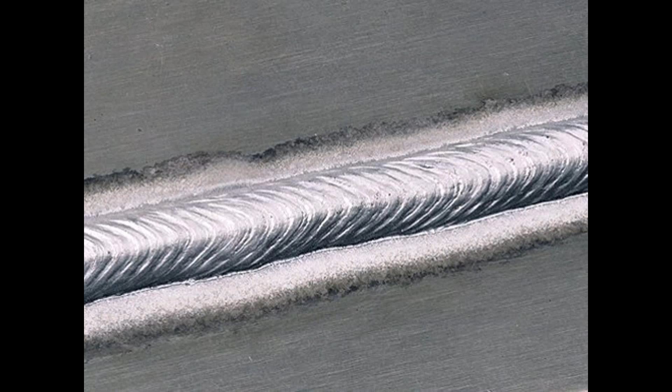I want to start out here by showing you this very nice looking aluminum weld, which has me recalling a story. Early in my career, in the 1980s, I was working down in Texas during the oil boom. There must have been a labor shortage, because even though I was relatively young, I rose to be the engineering manager at an aluminum fabricator company in the Houston area. As engineering manager, I was responsible for hiring and firing drafters, engineers, and cost estimators. And frankly, I didn't know a whole lot about that part of the business. Human resources was not something that had been invented yet. We just had employees and we were lucky to have them. So I decided that in recruiting and interviewing potential hires, I needed to get up to speed. I read some article in some magazines suggesting that the way to get to know a person was to ask them questions, get them talking about themselves. A good question to ask was, what are your biggest weaknesses and what are your biggest strengths? So the first guy that I'm about to interview comes in and I'm sort of fumbling around for what to say. Then I realized, oh yeah, I've got to ask him a question. So I said to him, so what's your biggest weakness? Without hesitating, the guy said, oh, my honesty. I was immediately taken aback because I was surprised. I said, well, I don't think of honesty as a weakness. And he said, yeah, like I care what you think.

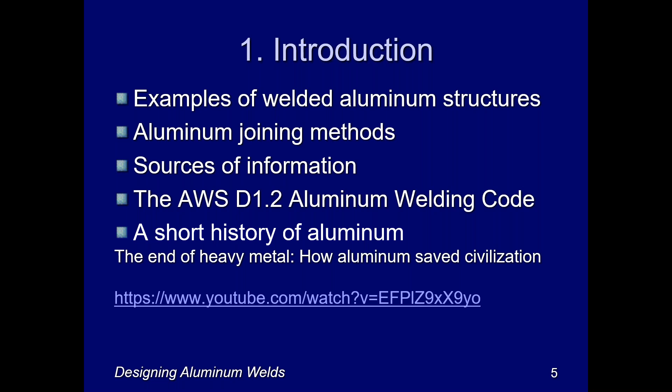When it comes to examples of welded aluminum structures, there have been many different types of applications welded in aluminum that have been very successful. I don't want to turn you off from aluminum welding, but there are a lot of cautionary notes, and we'll cover those.

Things like guardrails and handrails are very frequently welded in aluminum, typically using hollow shapes like pipes or tubes, but not necessarily. The weld at the base of the post of most guardrails is a very critical area because that's where the stresses are highest due to lateral loads on the guardrails or handrails. That's an area that comes up over and over again in my career.

Any sort of tank or vessel, whether for pressure or low pressure applications, corrosive, cryogenic, or low temperature applications where aluminum shines, if it's made from more than one plate or one extrusion, it's going to involve welding typically, because you need a liquid or airtight container.

Various highway products such as overhead sign structures, road sign structures, the little panels used to handle signal devices and control traffic lights, and light poles, otherwise known as luminaires in the highway business, many of those are made of welded aluminum. That's a very good example of welding and post-weld heat treatment and many other features of welding aluminum.

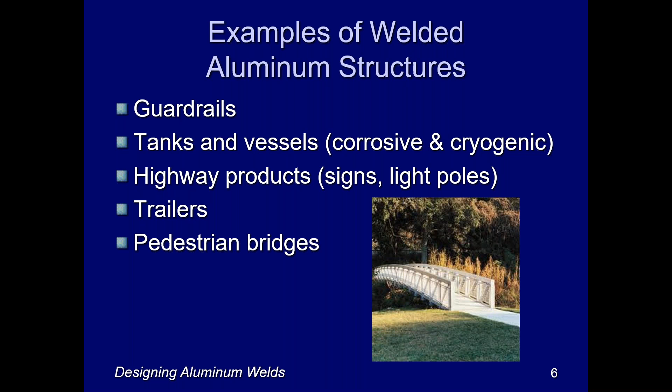Highway trailers, whether horse trailers or trailers hauled by tractor trailers going down the road with various consumer goods, are very often welded aluminum, because they need to be lightweight. Pedestrian bridges like the one in this picture, if they're in remote locations and need to be brought in off-road, typically want to use aluminum because it's light, and very often they're welded.

But we often use those connections in series. In other words, you'd have a fillet weld, and then connecting the other end of the part might be a bolted connection. So just to illustrate that that is a possibility and is done.

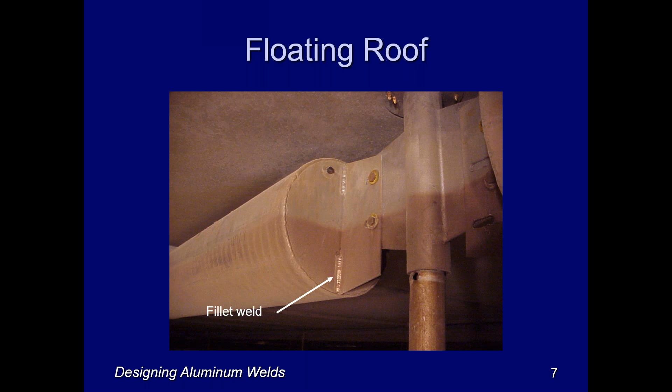Several years ago, I was involved in a bridge deck for the rehabilitation of an old suspension bridge. This is the Corbin Bridge in south central Pennsylvania over the Juniata River, 320-foot span. So it was a very long suspension bridge span of the late 1800s.

It was originally made with the ability to carry horse-drawn wagons across, and it had wooden planks for the bridge deck. Now, when automobile traffic was introduced in the early 1900s, they provided a paved roadway or deck on the bridge, but that was much heavier than what the bridge was designed for.

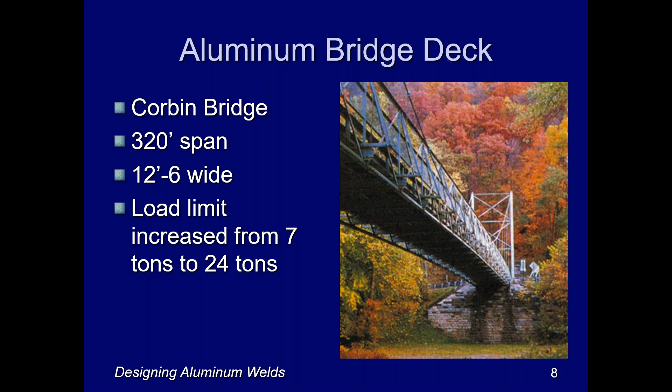With deterioration of the superstructure and foundations over the years, the load limit had been severely curtailed. But by changing the bridge deck from a paved steel combination deck to an aluminum deck, they were able to more than triple the capacity of the bridge.

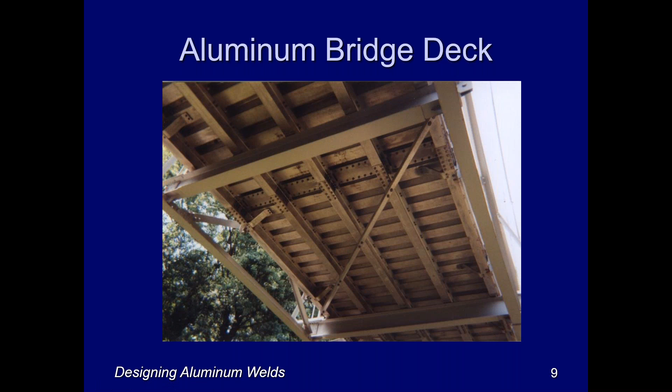You can see here in this picture from the underside that mechanical fasteners were used in parts to connect the various panels together that were aluminum extrusions that had been welded together in large 9 or 10 foot wide panels in the shop. So heads up there, we typically don't do aluminum welding in the field, but rather in the shop.

Now, there's a lot of ways to connect things, and there's a lot of ways that mechanical engineers and structural engineers look at things, but my father-in-law always subscribed to the notion that we engineers made things way too complicated, and that really there's just one of two answers for every problem. That was WD-40 or duct tape.

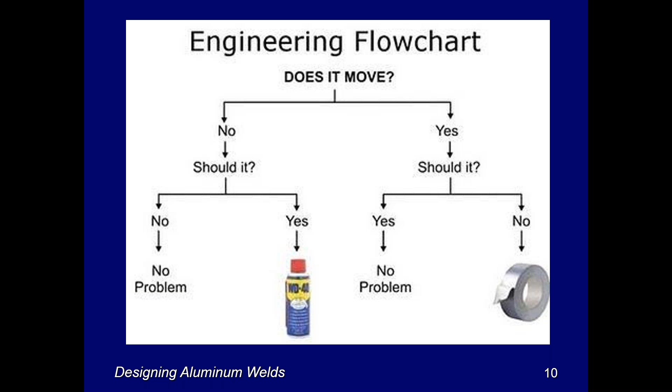But if you don't subscribe to that theory, if you think that maybe life is a little more complicated, you're probably right. Then you might want to look at the larger view of various joining methods. When it comes to joining methods, I think of mechanical fastened joints, welded joints, and adhesive bonded joints. It's really worthwhile thinking about all of these and deciding which of these is the most appropriate for your particular application before you just assume that you need to weld something together.

But when it comes to welding, there are different welding processes, and some of those could be categorized as fusion welding, and that'll be gas metal arc welding or gas tungsten arc welding, which we'll talk about in more depth. And then solid state welding, where we don't get above the melting point of the material. That's friction stir welding as a good example. We'll talk a little bit about that.

And then there are processes which are done at temperatures below the melting point of aluminum, but above the melting point of the various filler metals that are used, the brazing and soldering materials. We won't talk about those because they're not typically used in structural applications, but they can be used to provide airtight or gas-tight sealed joints.

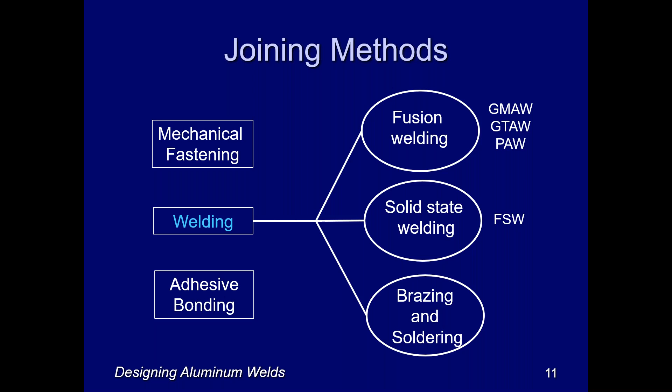We'll talk a little bit more about the aluminum design manual here in a moment, but just keep in mind that there are different types of mechanical fasteners. They have different pros and cons, and sometimes they're a much better alternative to welding for reasons that we'll see.

And I also want to mention adhesive connections because they are often used in structures. In fact, they're used in the aerospace industry for helicopter rotor blades as one example. And so they must be good for something. I mean, you trust your life to them essentially, but they're not addressed by building codes. And so they're not typically used in architectural applications.

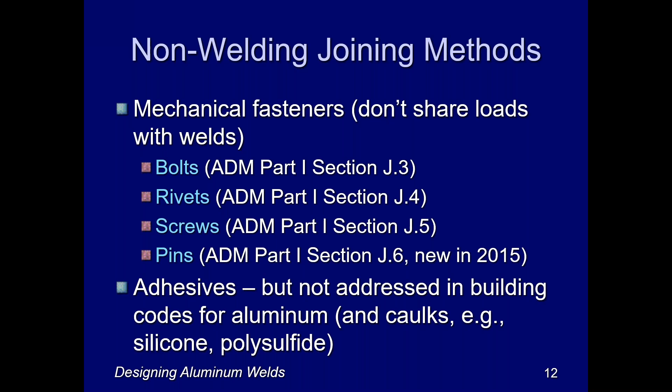I do want to mention that various types of caulks or sealants, such as silicone sealant or polysulfide sealants, can do an excellent job at non-structural joining of aluminum. For example, if you want to keep the weather out, or join flashing together, or something designed for weather tightness, sealants can be a very good way to join aluminum together when you properly prepare the surfaces as the manufacturer directs.

But coming back to welding, most people who do aluminum welding today are using an arc welding process, and there are two arc welding processes that are very popular. They're both inert gas shielded arc welding processes because an inert gas, either argon or helium, is used to shield the arc and the base metal that goes molten from oxidation. Gas metal arc welding, sometimes referred to as MIG welding, metal inert gas, is one of the two processes, and gas tungsten arc welding, sometimes referred to as TIG welding, is the other.

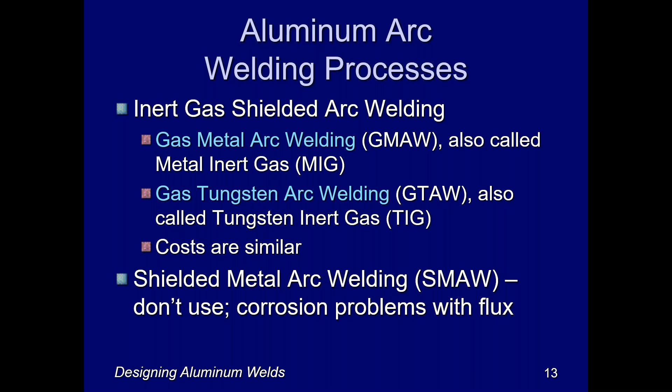Now, these two have rather similar costs when it comes to the overall bottom line cost, but they have different applications, and gas metal arc welding is probably the more popular and more commonly used today for reasons we'll see. Now, there also is shielded metal arc welding, but it has some real problems when you try to use it in aluminum. There's a flux used to remove the oxide from the aluminum before welding, and that flux is very difficult to remove and causes problems down the road with corrosion, so it's not a recommended process.

There are other aluminum welding processes. I already mentioned friction stir welding, and stud welding is another, either by arc welding or capacitor discharge processes, and plasma arc welding. These are addressed by the American Welding Society Structural Welding Code D1.2, but there are yet even other welding processes that are perfectly good for aluminum, used say in the automotive industry: laser welding, resistance welding, electron beam welding, all sorts of exotic processes that have very narrow applications typically. We're not going to talk about those because they're not as widely used, and they tend to be for various niche applications.

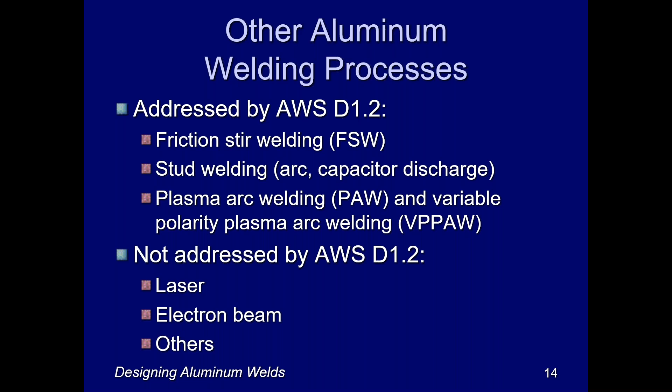Now, that electrode wire is being pulled off a spool, which is back in a cabinet, and this wire feed mechanism is going to deliver that wire to the arc through that gun, and it's going to be done at whatever speed you set the machine at. Therefore, this process is sometimes referred to as a semi-automatic process, since the machine is going to control the wire speed, and the operator or welder is going to control the speed at which you move the gun along the joint.

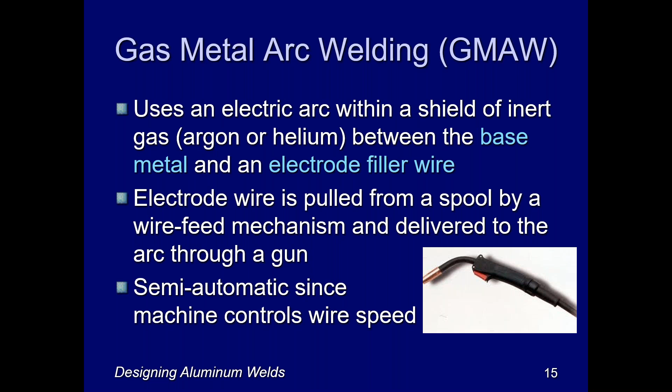And if I want to add filler metal, I can do so with a rod held in my left hand that I feed into the joint. Now, if I don't use any filler metal, it's referred to as an autogenous weld, which is really just a fancy way of saying I'm melting the two parts together. And that's typically done with sheet metal.

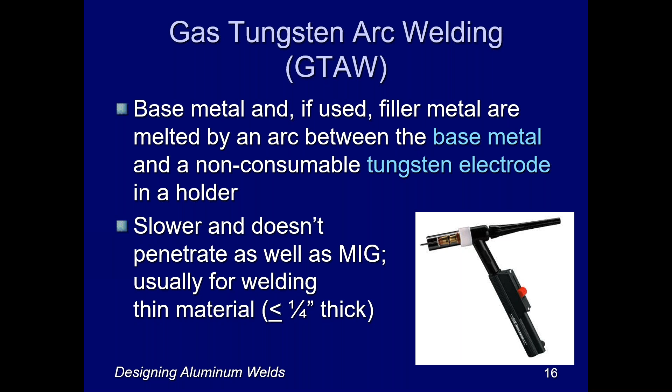Now, TIG welding is much slower than MIG welding. A lot of people think the speed of welding is what's going to control your costs. That's not entirely true, but people like to weld quickly. They might tend to use MIG instead. And furthermore, TIG welding is typically best used on thin material, say a quarter of an inch thick or thinner.

Now, before we leave the welding processes, we'll talk about friction stir welding. It's a relatively new process, patented in 1991 in the United Kingdom. It's a really slick process.

There's no edge prep in making a groove weld, so you don't have to bevel the sides of the joint or the parts. You don't use any filler metal. You don't use an electric arc. Therefore you don't need any shielding gas, and therefore there are no fumes.

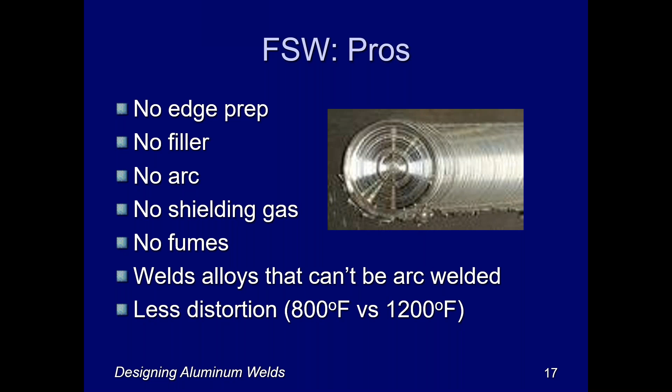And you can weld together alloys that can't be arc welded, and you do this all at a lower temperature than the melting temperature. Instead of 1200 degrees, which is an average melting temperature for most aluminum alloys, you do it at 800 degrees, and therefore you have less distortion and less heat effect on the base metal. So the process looks something like this.

There can be an exit hole at the point of withdrawal, and that can be an issue sometimes. Sometimes you need to use a runoff tab, or you need to have the exit hole in a low stressed area of the part, or maybe you need to MIG weld a plug in that exit hole, but there's various ways to address that. There are also more complicated friction stir welding processes that eliminate exit holes, but you get the idea.

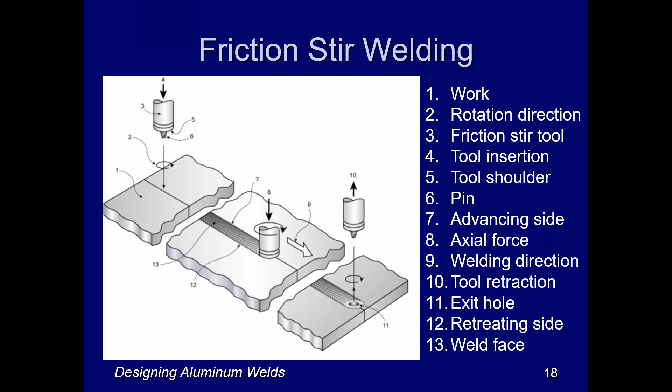In the summer of 1975, I was working as a construction inspector and surveyor in south central Missouri, and I'll tell you, it really got hot down there. At the end of the day, it was really nice to come home to a cold beer.

Now you're asking yourself, what does this have to do with aluminum welding? I'll get there. The summer of 1975 is also the first year that light beer was introduced. Miller went on an ad campaign and said less is more, their promotion for light beer. Less calories, you get it. I saw that and said, wait a minute, less is never more, more is more. That doesn't make any sense.

But being very thirsty and willing to try different beers, as I always am, I said, yeah, let's give it a try. I tasted Miller Lite and came away convinced that no, less is not more, more is more. Light beer is a travesty, the worst thing that ever happened to beer. How could you take something as good as beer and ruin it by trying to make light beer? So I became convinced that no, less was never more.

Until a couple of years later, I got involved in aluminum welding, and then I realized there are times when less is more, and that is in welding aluminum. The less welding you do on aluminum, the better off you are. And that's for many reasons.

First of all, no matter how perfect your welding process is and how good your welder is, welding decreases the base metal strength of virtually all aluminum alloys that have been tempered to get more strength. So it wipes that out. Not only that, welding can distort members because of differential cooling. You have residual stresses that result in distortions, and that can be a real problem.

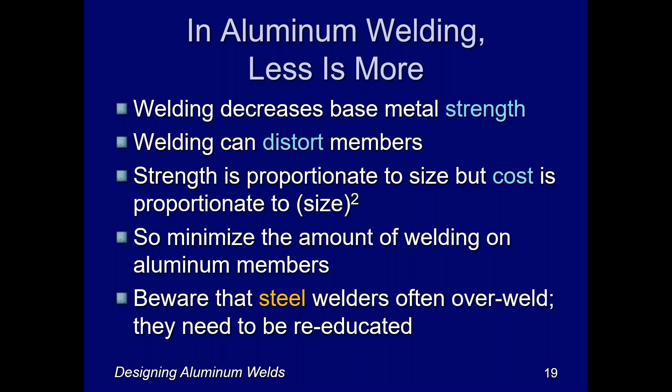That's a problem for people traditionally welding steel because they figure, hey, if I give you a larger weld than you call for, you ought to be happier than a pig in slop, and that's just wrong. In the case of aluminum, less is more and more is less.

Let me give you some sources of information because I'm not going to be able to cover everything for you here, but I do want to mention three good sources. One is the American Welding Society, not only because they carry the Structural Welding Code D1.2, but other publications such as the Practical Reference Guide to Welding Aluminum.

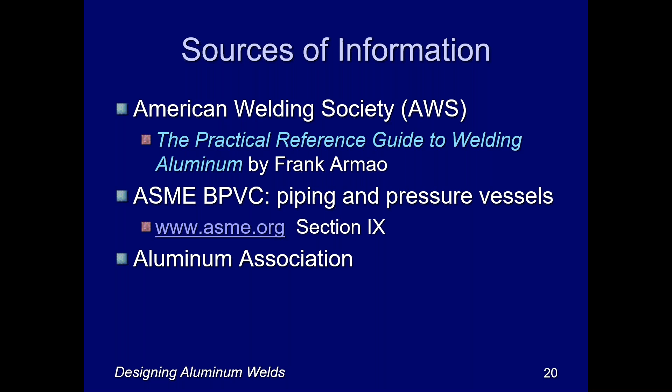The American Society of Mechanical Engineers Boiler and Pressure Vessel Code, Section 9, has got a lot of good information on welding aluminum vessels and vessels of other metals. So if you're involved in vessel and boiler type applications, that's something to look at.

The Aluminum Association goes back to about 1933, and today it consists of over 100 members, all the major U.S. aluminum producers and suppliers. It writes most of the standards used worldwide on aluminum, which is very good for Americans because we're more familiar with these standards and ways of designating aluminum alloys and so forth. This can be a very nice thing for us.

I provide their contact information there, but suffice it to say that aluminum.org will get you to their location. They're in the Washington, D.C. area, but their website contains all their publications and a nice bookstore to get them. And by the way, if you think I'm promoting any of these organizations or their books, I don't get any commission off their sales, so I don't mind if you buy them or not, but I'm just trying to point out what might be useful to you.

One of the best books ever written about aluminum welding is an Aluminum Association publication called Welding Aluminum Theory and Practice. Now it's become a little dated since the last edition was 2002. We've been working for the last year or so trying to rewrite it, and it's almost ready to be republished. So you might want to think about holding off before you buy the next edition, but it's a very good and very informative look at aluminum welding.

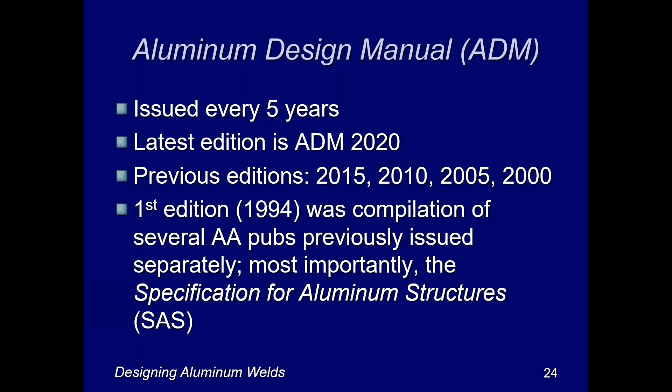But I do want to also mention that the Aluminum Design Manual has got some other very useful parts. For example, part 6, Design Aids, contains lots of handy design charts, including welded allowable aluminum stresses, and part 7, the illustrative examples, includes welded connections that you might find useful, particularly for those topics.

But the Bible of aluminum welding is the AWS D1.2 code. You know, you could say there are only 3 things you need to know about aluminum welding: the first one is D1.2, the second one is D1.2, and lastly, you get it, D1.2. I say that, obviously it's the old joke like in real estate, but it's very true. There's no substitute for having D1.2 and having a basic understanding of it if you're going to do aluminum welding in the United States.

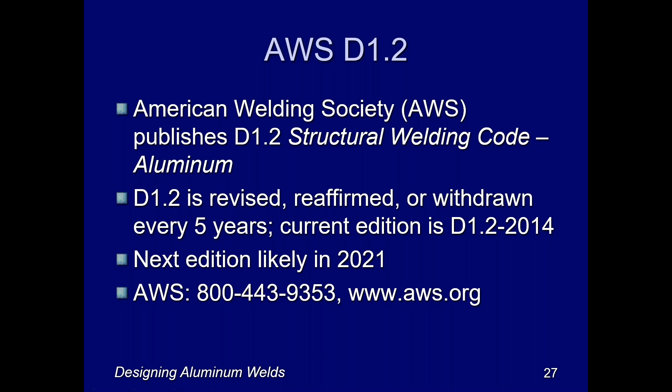Now, this document is supposed to be revised, reaffirmed, or withdrawn every 5 years, but the last edition was 2014, and here it is 2021, and we're still struggling to get another edition out. I think the next edition will very likely come out before the end of the year. The pandemic had nothing to do with the delay in this publication. Rather, it was internal issues at AWS and in satisfying the various committees that need to approve this code. But at any rate, this is coming out soon as a revision without terribly many changes, but a few important changes from 2014. And I give you the contact info there at AWS in case you want to get a copy.

D1.2 scope is welded aluminum structures, and that includes anything you call a welded aluminum structure - that's just a general moniker. There are other codes, like the boiler and pressure vessel code, that address particular applications like pressure vessels, and there are federal codes for tanker trucks that go down the highway. But D1.2 is for everything that doesn't fall into a particular application with another code governing.

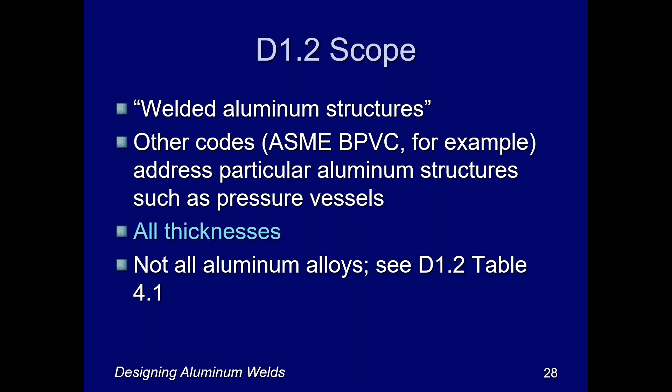It covers all thicknesses of aluminum parts, so you can weld together sheet metal or 8-inch thick parts. But it does not include all aluminum alloys, only those listed in Table 4.1. It typically does not include aerospace alloys like the 2000 and 7000 series because of their copper content - they're not easily arc welded, though they can be friction stir welded. That's another reason to be aware of friction stir welding. But those are the only limitations in D1.2.

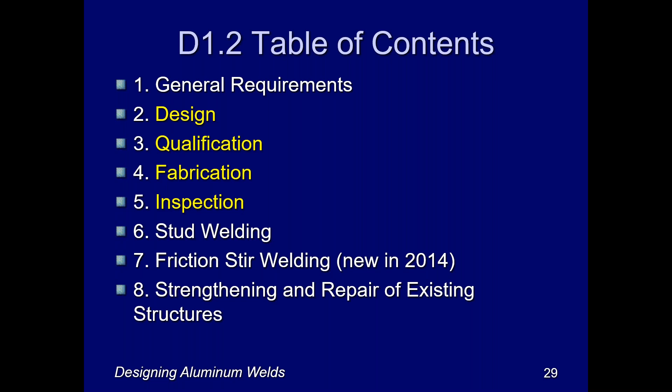A lot of people are familiar, if at all, with AWS structural welding codes through D1.1, because D1.1 came before D1.2 - it's the steel welding code. People familiar with D1.1 want to know what's different about D1.2, and I think that's a handy point of reference. There are some fundamental differences: there are no pre-qualified weld procedure specifications in D1.2. You have to qualify every procedure that you use, and that's a big difference.

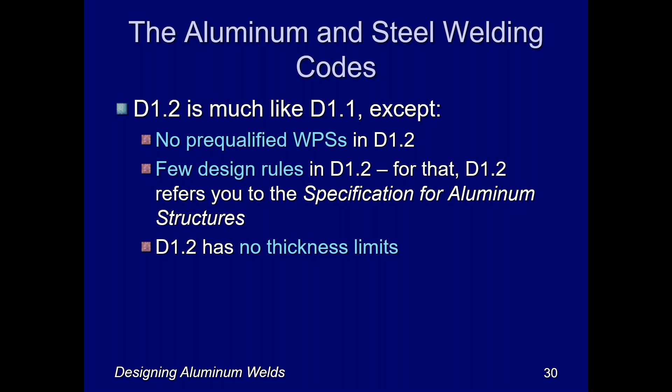There are very few, if virtually any, design rules in D1.2. The nice thing about D1.2, in my view, is that it refers you to the Specification for Aluminum Structures for those design rules, so there's no competing design rule sets in different documents. D1.2 tells you for design, go to the Specification for Aluminum Structures. The other thing is there are no thickness limits in D1.2, unlike D1.1, which only goes down to a minimum thickness of something like 1/8 inch.

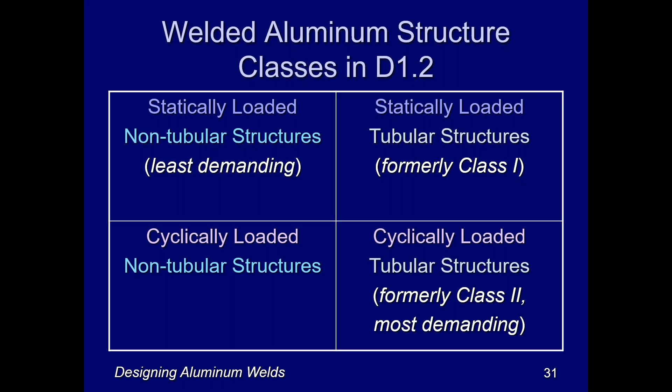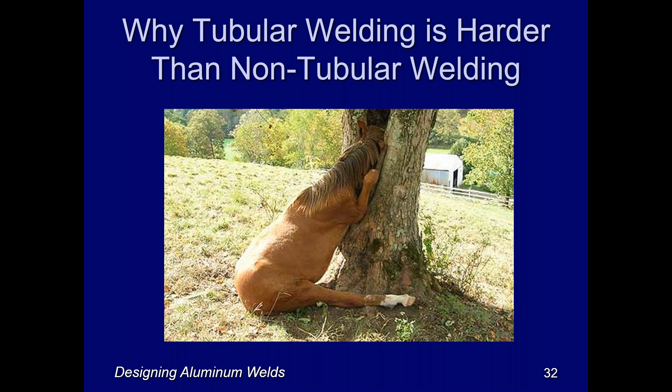Okay, enough of a general introduction.

Let me now talk a little bit about the metallurgy involved here. We'll talk about the metallurgy of the base metal, the parts to be joined, and the metallurgy of the filler metal, the metal we're going to fill the joint with to make the connecting material. When those two parts get melted together in some mixture, that's referred to as the weld metal, and its composition is somewhere in between the base metal and the filler metal, depending on how much dilution occurs in the joint. That's a function of a lot of factors, and it's going to determine the strength of the joint.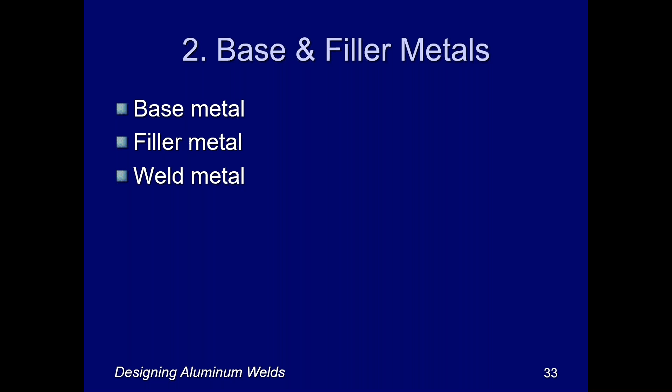Now, I mentioned earlier that when you weld aluminum, you typically reduce any strength that you got from tempering. Tempering processes like strain hardening or artificial aging are used specifically to strengthen the aluminum from its base metal condition, and when you weld it, you wipe those out. So that's a big drawback in welding aluminum.

Any kind of heating, for that matter, a fire, a paint bake cycle, can have that effect unless it's very controlled. In the case of welding, the temperature is so high, above the melting point, that it's going to reduce the strength on either side of the joint, and that's inescapable. So for H-temper material, welding reduces the strength to the annealed condition, and for T-tempers, it reduces the strength to something a little less than the solution heat treated, or T4 condition. Keep in mind that some alloys are not arc weldable - those would typically be in the 2000 and 7000 series.

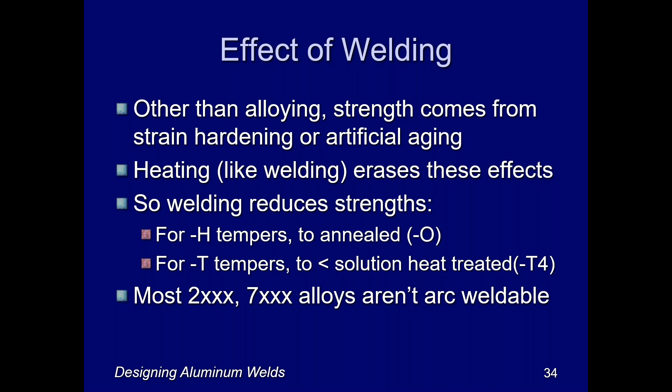So to show this graphically, a little bit clearer, there are the non-heat treatables and the heat treatables, and they respond a little bit differently. Most extrusions tend to be heat treatables, say 6063, T5, T6. What we see is that if we've done a precipitation heat treatment in addition to a solution heat treatment, so we have a T5 or T6 temper, when we weld it, we're going to reduce the strength to something less than the T4 strength, but a little more than the annealed strength. So what is that strength? How do we know what that number is?

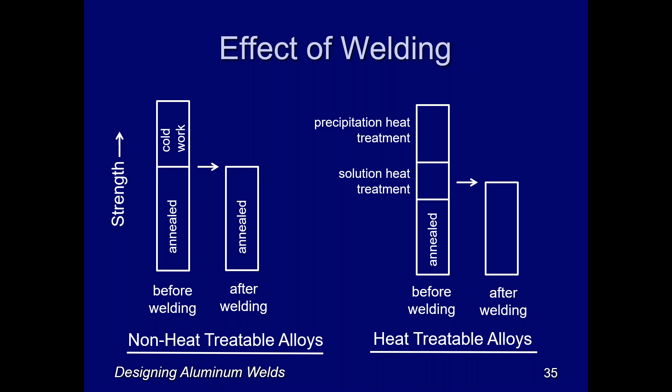Well, fortunately, the welded strengths of the base metals are listed in the specification for aluminum structures in table A43. The notation there is to add a W to the subscript, so when you see F sub TUW, that means the tensile ultimate strength in the welded condition, and F sub TYW would be the yield strength in the welded condition. Very fortunately for everybody, the AWS D1.2 table that gives the tensile ultimate welded strengths for the base metals has the exact same numbers as the specification for aluminum structures.

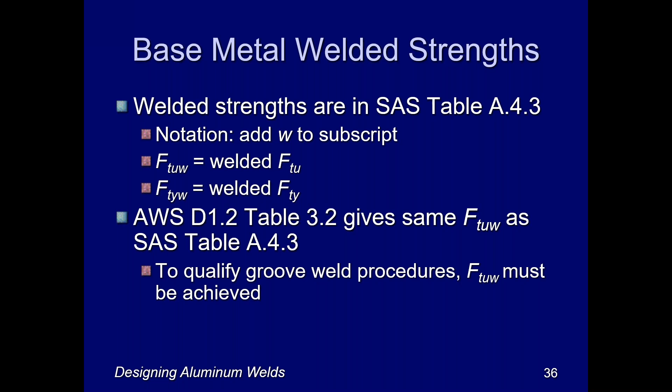And the requirement that D1.2 has is that if you're qualifying a groove weld procedure, you must attain in your testing the tensile ultimate strength in the welded condition given in these tables. That's determined by a tension test of a reduced section specimen, sometimes referred to as a dog bone specimen for obvious reasons from its shape. That tension test is used to determine the strength of groove welds, to prove that your weld is not going to be the weak link, and that you're going to develop the full tensile ultimate strength in the welded condition of the base metal.

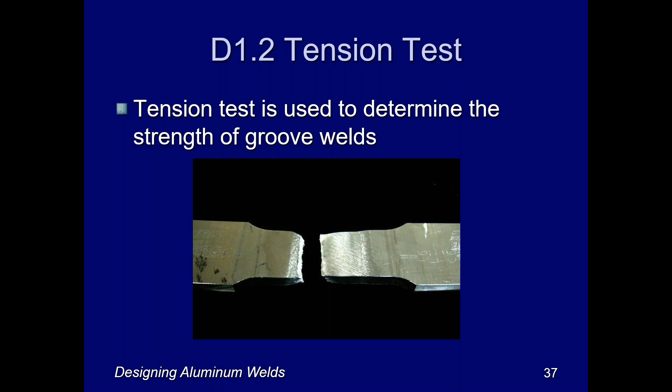So what does that do to the strength of the base metal? I've got 4 examples here - 2 of them are plates, 5052 and 5083, not extrusions, and the other 2 are 6000 series extrudable parts, like 6061 or 6063. Just to give an example, for 6061, if I have it in the T6 condition before welding, as an extrusion with a 38 KSI minimum tensile ultimate, I go and weld it - well, I drop the strength down to 24 KSI. So take a big whack.

And that reduction in strength is not something that I can overlook - I've got to factor that into the design. Not only that, the yield strength goes down even more - it goes from 35 KSI down to 15 KSI, less than half. And again, that can't be overlooked. It must be accounted for in the design.

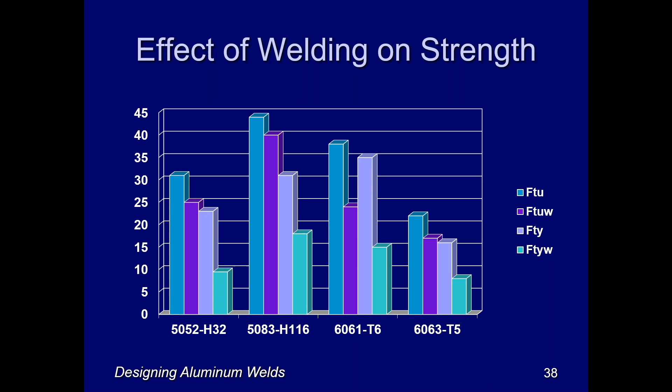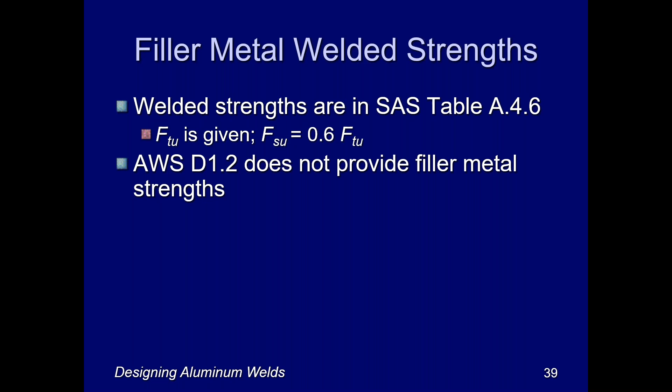Now, that's the base metal. For the filler metals, their welded strengths are given only in the specification for aluminum structures in table A46. They give the tensile ultimate strength there, and they say the shear ultimate strength is just 60% of the tensile ultimate strength. D1.2 is totally silent on filler metal strengths, so you've got to get them from the specification for aluminum structures.

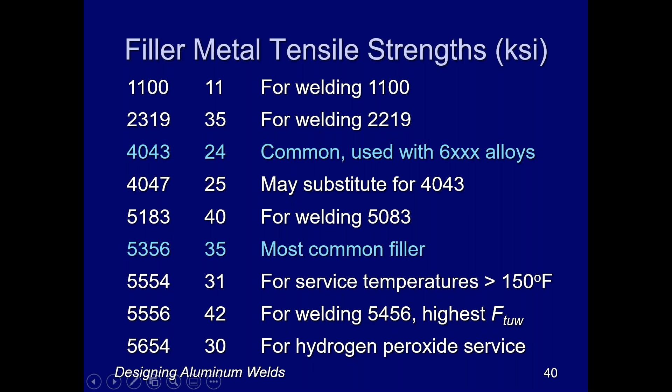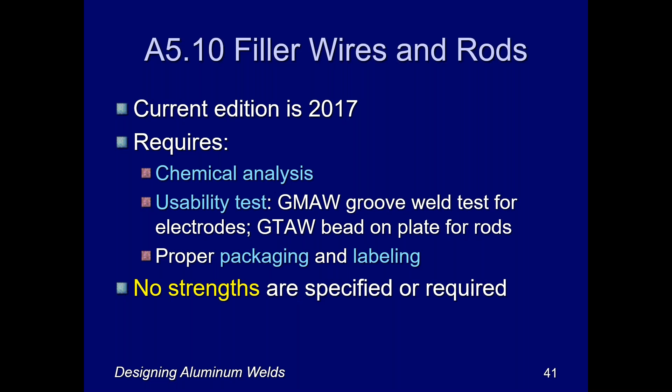Now, A5.10 is a publication put out by AWS, and it addresses filler wires and rods. The current edition of 2017 does not have any specified strengths either, so again, the only place you can get the strength of filler metal is to go to the specification for aluminum structures in the aluminum design manual. A5.10 though does have other requirements like chemical composition and important things like packaging and labeling, which you might be surprised at how important that is in preserving the usability and quality of filler wires. But A5.10 is useful in at least those regards.

Now, because there's a bunch of different filler alloys, and even if you're only going to confine yourself to 4043 or 5356, there are oftentimes questions that people encounter: how do I pick what filler alloy I'm supposed to use? To be honest, there are quite a few factors that may be taken into account in picking the filler, but I would say the first two are the fundamental and most important.

First of all, the strength has to be chosen properly. If you're doing a groove weld, the strength of the filler metal has to equal or exceed the strength of the base metal in the welded condition. Otherwise, you're not going to be able to pass that qualification test with that little dog bone specimen, and you can go no farther. The other thing is that the chemical composition of the filler metal and base metal have to be compatible so that you don't get hot cracking. Certain compositions of certain trace or alloying elements can be very prone to hot cracking. In other words, as the weld is cooling from its molten condition, they're very sensitive to cracking, and those combinations just those dogs won't hunt, so they don't work.

But there are other considerations like ductility, corrosion resistance, what service temperature you're going to be at, what sort of a color match you're going to get, particularly if you do a clear anodized finish. And the appearance—how the bead looks, whether you get a smooth bead or a ripple bead, whether you're post-weld heat treatable or not—depending upon your selection. So those can be important factors in various more refined considerations.

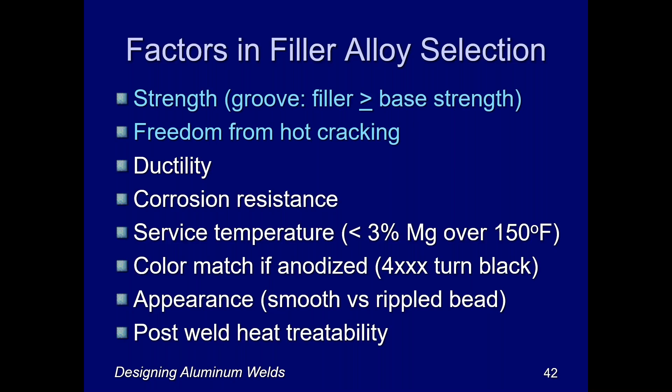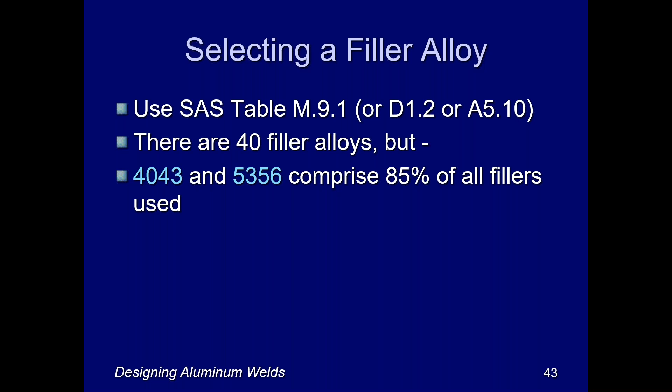Now, if you want to just follow the rules and avoid hot cracking, you can select a filler alloy using tables given either in the specification for aluminum structures, D1.2, or A5.10, the AWS publications. It can seem really complicated because there are 40 different filler alloys listed in A5.10, for example, but 9 times out of 10, or 85% of the time, it comes down to 4043 or 5356. Just to compare those two for a moment: 4043 is a little more fluid, a little less viscous, and it doesn't suffer so much from the black smut produced by the high magnesium content of the 5356 filler. But 4043 is less ductile and has lower strength than 5356.

On the other hand, 4043 has less cracking sensitivity and better penetration. So there's not a clear winner when it comes to deciding between these two, but rather it depends on your needs and your particular type of weld.

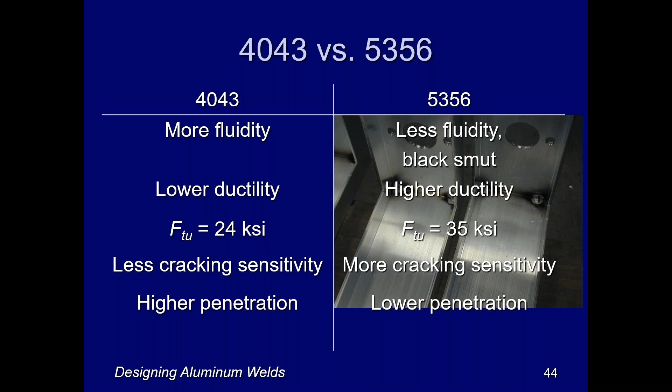Now, I mentioned crack sensitivity, and if you want to put a finer point on it, the composition of the weld metal after the weld is made—mixing the base metal and the filler metal—will dictate whether or not you're in the crack sensitive zone based on a certain composition of the alloying element. So for example, if you've got silicon in your base metal and filler metal, you want to avoid silicon content in the weld metal of between 0.5% and 2%. That's where the crack sensitivity is the worst.

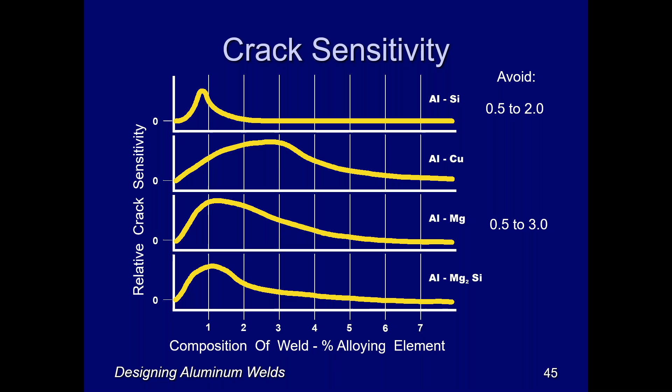If you can anticipate what the dilution will be in your joint, you can anticipate whether you'll be in that crack sensitive composition. To illustrate, you have very little filler dilution in a fillet weld, as shown at the top of this figure, and very high dilution of the filler metal at the bottom, which is a square groove weld. A V groove in between will have filler metal dilution somewhere between a fillet weld and a square groove weld.

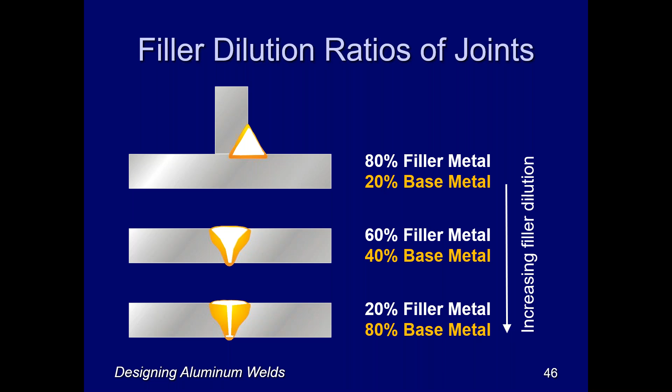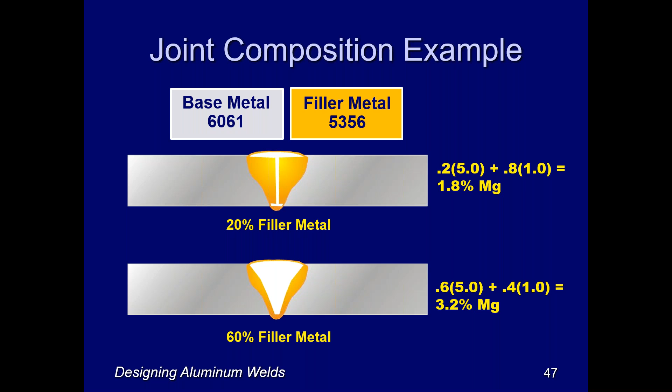These are things important to keep in mind, so a filler metal that works for a fillet weld might not work well at all for a square groove weld in terms of cracking sensitivity. The composition of the weld metal is calculated based on how much dilution you have and the composition of, say, the magnesium in the base metal and filler metal, as shown in this example: a square groove weld or V groove in base metal 6061 with filler metal 5356.

Now that we've talked about the composition of the base metal, weld metal, and filler metals used, let's talk about design. That'll be our last topic.

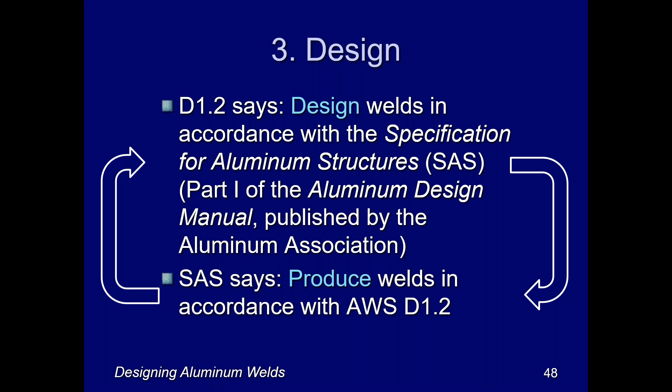D1.2 says design welds in accordance with the specification for aluminum structures, and the specification for aluminum structures says produce welds in accordance with D1.2. So these two documents fit hand in glove, it's a nice fit, and they dovetail well. The specification for aluminum structures is divided into a series of chapters with letters as their titles.

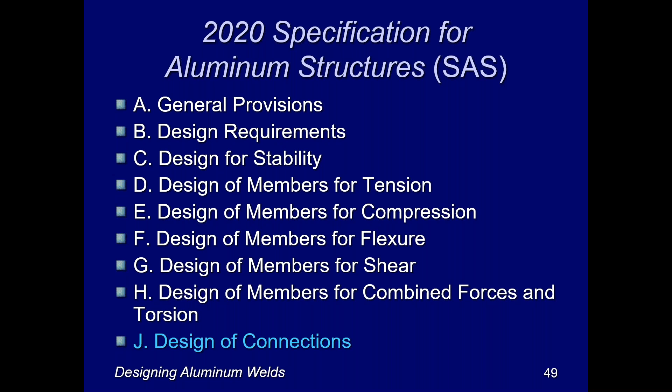For example, chapter J, highlighted at the bottom of this slide, design of connections, deals with design of bolted connections, welded connections, and so forth. That's a chapter we would typically look at when designing aluminum weldments. But there are other chapters included in the specification for aluminum structures.

I won't talk at length about those here, but suffice it to say the specification covers all aspects of aluminum structural design, not only strength but serviceability - for example, making sure parts or structures don't deflect more than they should in order to maintain their serviceability.

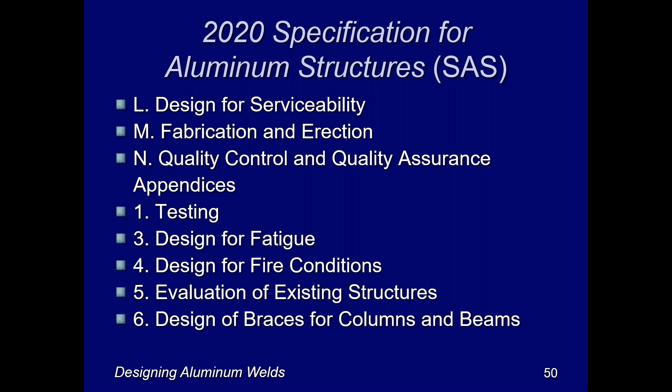There are two aspects to welding design covered in the specification: welded connections and welded members. We don't have time to get into the design of welded members, but that's covered by chapters D through G for various types of stress. Just be mindful that welding not only affects the strength of the connection, but you also need to consider the effect of welding on the strength of the members themselves.

If I see one error more frequently than any other, it's that people overlook this - they size the weld and look at the connection strength, but they don't look at the effect of welding on the strength of the member. That's something to keep in mind.

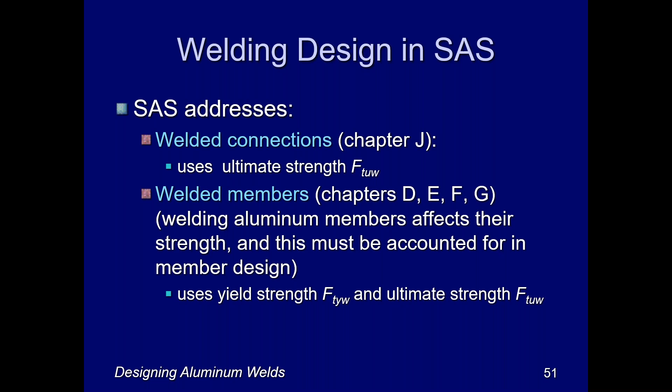With welded connections, the only material strength we need to be concerned with is ultimate strength, because we don't worry about a little bit of yielding in connections. But with welded members, we need to know the yield strength as well as the ultimate strength, so it's a little more complicated.

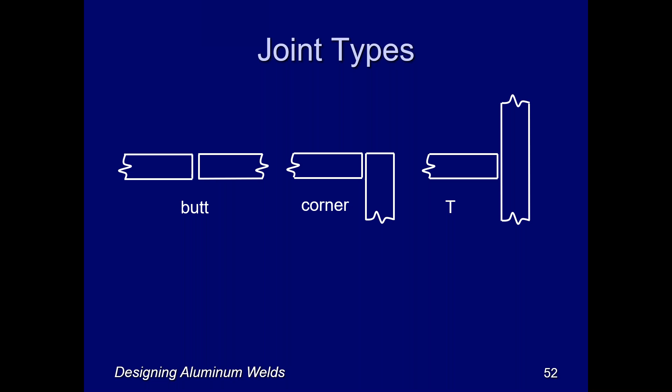With welds, we want to first be aware of what type of joint we have, then we can talk about what type of weld we have. The joint types typically encountered in structural applications are butt joints - two plates or extrusions butted end-to-end - corner joints, and T-joints. These are described in various American Welding Society publications, but there are weld types, and different weld types are suitable for different joint types.

For example, the groove weld I'm showing here is in a butt joint. Groove welds and fillet welds are the ones we'll talk about here, due to time limits, but there are other types like plug and slot welds and stud welds also done in aluminum, each with their individual niche applications.

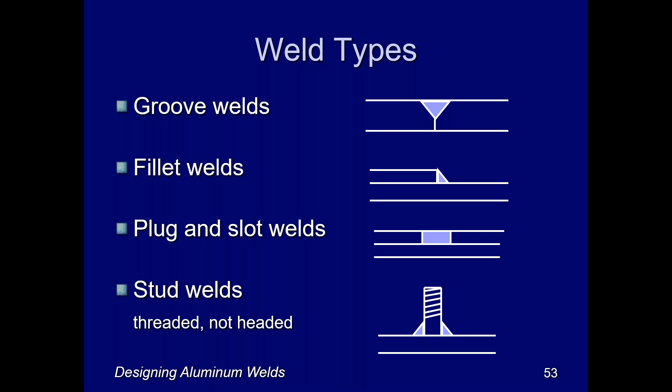Here's a groove weld, a picture I took in a sign shop up in Milwaukee, between two parts that are, I forget, 3/8 or a quarter of an inch thick - a typical example of a groove weld.

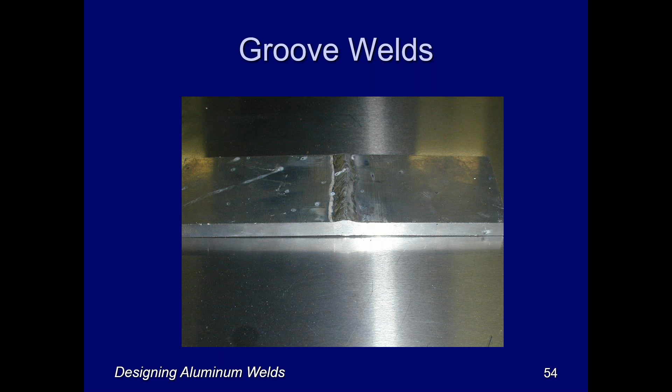Now, in order to determine the allowable strength of a groove weld, we take the allowable tensile stress times the effective area of the weld. The effective area is going to be the size of the weld times the effective length of the weld.

Now, the size is different depending upon whether we have complete joint penetration or partial joint penetration. If we have complete joint penetration, the size of the weld is the full thickness of the part. If we don't have CJP but have PJP, partial joint penetration, then the size of the weld is equal to the depth of preparation, the depth of that groove you saw in the sample weld above. And the effective length is just the width perpendicular to the direction of stress.

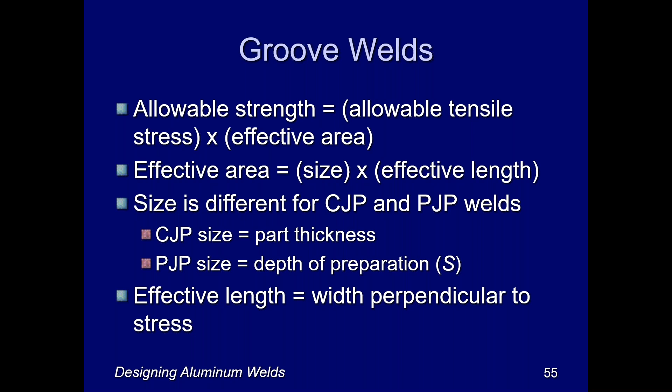Now, how do you know if it's a CJP or a PJP? Well, the basic rules are, with small exceptions, it's CJP if you weld it from both sides. First you weld it on one side, flip it over, back gouge the crud and stalagmites drooping out of the backside, and then weld the backside. Or you weld it from one side with an integral or removable backer on the backside to prevent the crud and stalagmites from accumulating there.

Otherwise, it's PJP. In other words, you welded it from both sides but didn't do the back gouging, or you welded it from one side without a backer. Why would you weld it from one side and not have a backer? Maybe because it was a tubular part you were joining and there was no way to get a backer on the backside.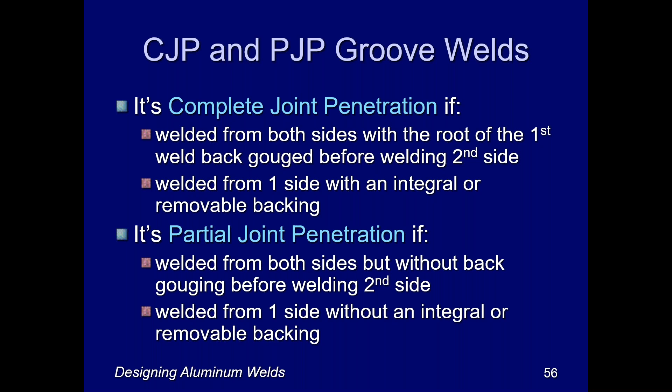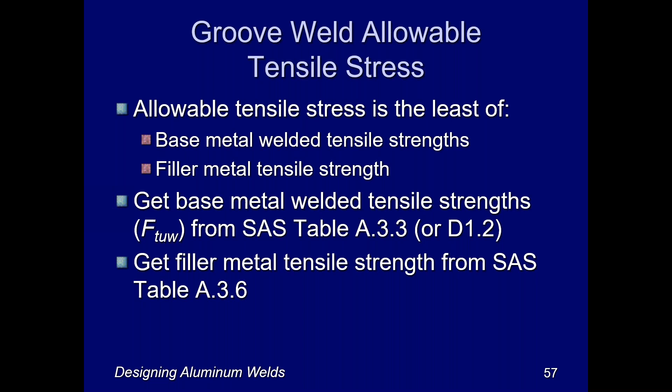Now, the allowable tensile stress is the other part of the equation once we've got the size of the weld and the area of the weld. The allowable tensile stress is the least of the base metal welded tensile strengths and the filler metal tensile strength. We get those base metal welded tensile strengths from the Specification for Aluminum Structures table or the D1.2 table, and we can get the filler metal strengths only from the Specification for Aluminum Structures.

And so the strength of a groove weld is really just another demonstration of the principle that a chain is only as strong as its weakest link. So we have base metal in the heat affected zone on one side of the joint, the filler metal in the middle, and the base metal in the heat affected zone on the other side of the joint.

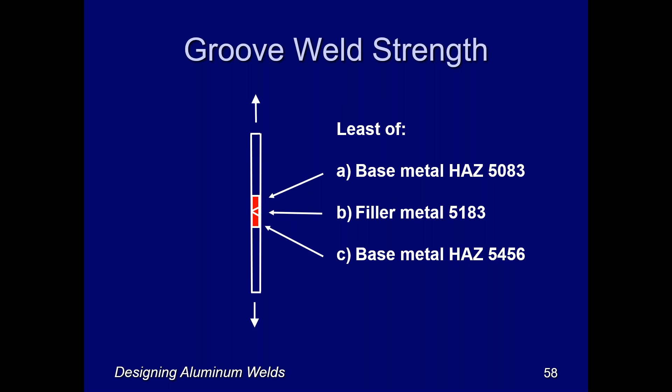Let's say, for example, I'm welding together 5083 and 5456 with a 5183 filler. In that case, I need to look at the strength of each of those three parts. For the base metal, let's say it's a 4 by 3/4 inch thick bar, and I'm going to weld it from one side without a backer, using a 5/8 inch deep V groove as my preparation.

The reason we make that V groove is to allow the welder access to the root of the joint so he can get penetration at the root. But if we don't use a backer or back gouge and weld from the other side, we can't be assured of fusion beyond the root, and therefore that last 1/8 of an inch of thickness of the material here doesn't count as the size of our weld.

So this weld is a PJP because I didn't use a backer, and the size is 5/8 of an inch, the depth of preparation. The length is 4 inches because it's a 4-inch wide bar, which makes the effective area 2.5 square inches.

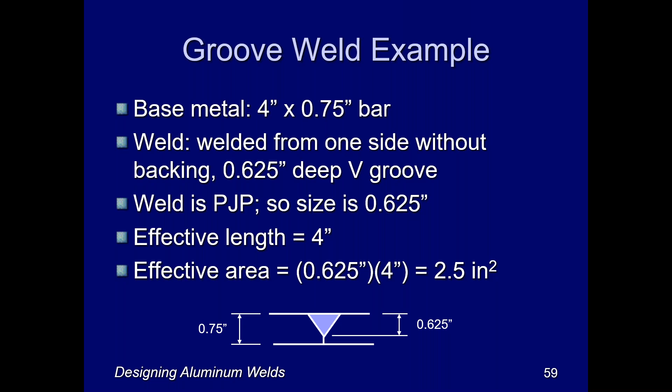Now I need to determine the tensile strength, and for the base metal on the 5456 side, that's 42 KSI. For the 5083, it's 40 KSI, looking those up from the tables. For the 5183 filler metal, that's 40 KSI. So the least of those three is 40 KSI, and now I'm able to calculate my strength.

One more thing you need to be aware of is that for PJP welds, once we've calculated the allowable load, we need to factor it by 0.6. In other words, we need to reduce its strength by 40% because of the notch effect of not having fused metal at the base of the joint.

Therefore, I apply that 0.6 factor times the area of the weld, 2.5 square inches, times the 40 KSI strength. I divide it by a safety factor, which for building structures is 1.95, given by the Specification for Aluminum Structures. That gives me an allowable load of just shy of 31,000 pounds, or 31 kips, a kip being 1,000 pounds.

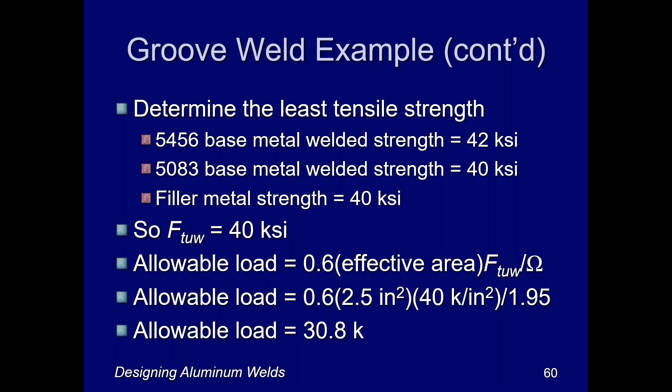That 0.6 factor, as I said, is just accounting for the notch effect of that potentially unfused metal at the root of the joint. And I strongly discourage you from using PJP groove welds for that very reason. You've got that factor that knocks your strength down, and the fact that you've got a built-in crack essentially at the root of your joint doesn't give me great confidence or hope for the future for that type of joint.

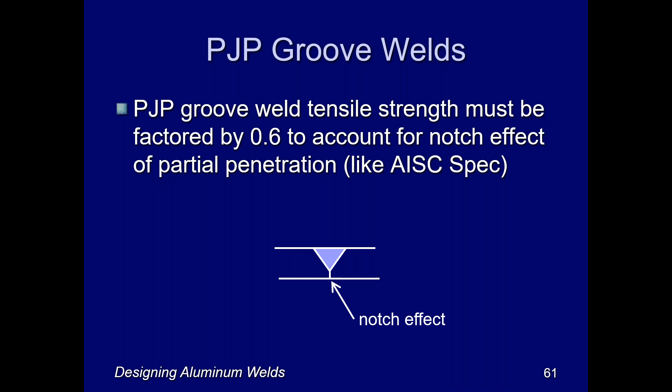Now, fillet welds, on the other hand, you calculate their effective area by determining their effective throat, which we'll see a picture of, times their effective length. And just like in steel, we consider that stress on a fillet weld is shear on that area, on that throat, for any direction of load. It's not really true. There's a combination of tension and shear on that throat, but we always consider the stress to just be shear there.

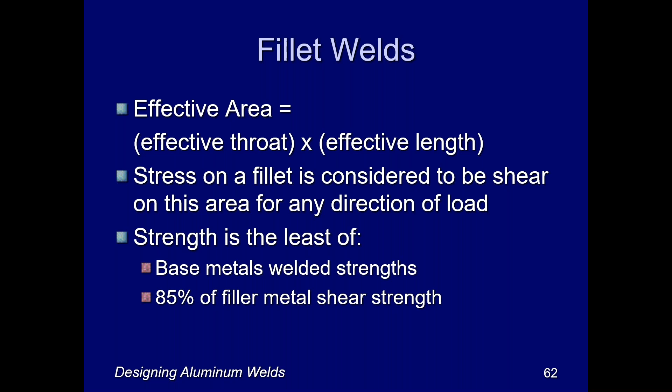And that's a conservative assumption because the shear strength is less than the tensile strength. And the strength then is going to be the least of the base metal welded strengths and 85% of the filler metal shear strength. That 85% factor is the knockdown factor for fillet welds. And that's because fillet welds represent a disruption in the stress flow through a part. They represent stress risers both at the beginning and at the end of the weld as you're going down the length of the weld. And then cross-sectionally, they represent an abrupt transition between the weld metal and the base metal. Therefore, that 15% knockdown, in other words, applying a 0.85 factor, is designed to take that into account.

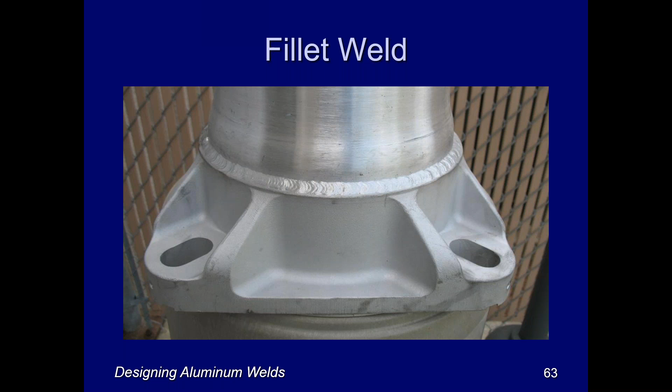And here's a fillet weld on the base of a light pole, for example, and you can see a nice triangular cross-section weld in that view.

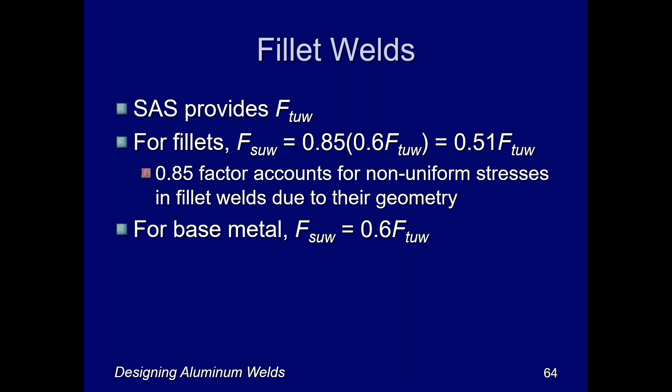So you get the tensile ultimate strength of the filler metal from the specification for aluminum structures. And for the fillet weld, then we're going to take 85% of 60% of the tensile strength, because remember, the shear strength is 60% of the tensile strength, and we consider shear to be acting on fillet weld throats. Therefore, that works out to be 51% of the tensile ultimate strength. For base metal, we don't have that 0.85 factor because it doesn't have the stress riser that the fillet material does, and so it's just 0.6 times the tensile ultimate strength.

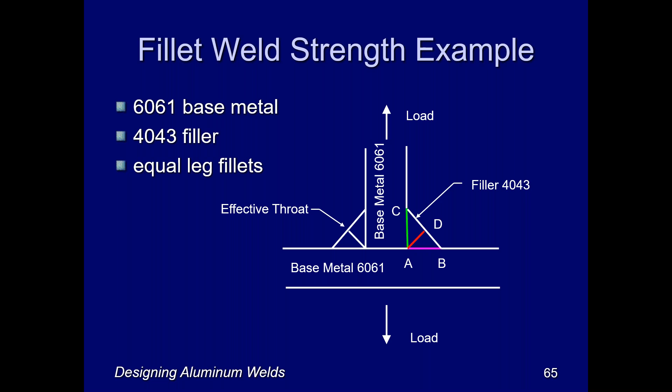So here is an example of a T-joint, and we have 6061 as our base metal and 4043 as our filler metal. And in order to design this weld, if they have 4043 filler metal, you would look at three lines of stress: the line represented by AC, or the green line, which would be shear in the base metal; the line represented by the purple line, the AB line, which would be tension in the base metal; and then the red line, the throat of the weld, or the AD line, representing the shear on the throat of the weld. We would calculate the stress on each one of these, and we could determine which one was the least. And we're typically going to find, and in almost all cases we'll find, that the filler metal allowable is the governing strength of the joint.

It's 6.3 KSI, whereas we have stronger strength of the base metal in shear and stronger yet in tension. And of course, we would expect that because tension strength is always greater than the shear strength.

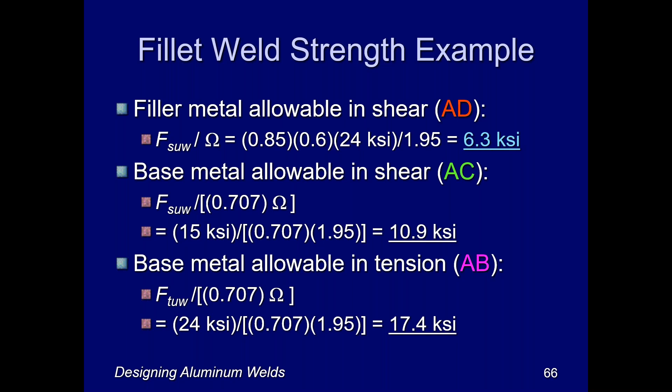And what that means is that you need to make the weld length appropriately long for the base metal. So when you have a case where the filler metal governs the design, you need to size the fillet weld and the length of the weld in order to match what your demand on that particular joint is. This is very much unlike groove welds, where the base metal strength governs the weld strength.

So in groove welds, it's the opposite. You choose the filler metal so that it matches the base metal strength, the weaker of the two at the very least. And that's necessary in order to pass the qualification test for the procedure to make the weld.

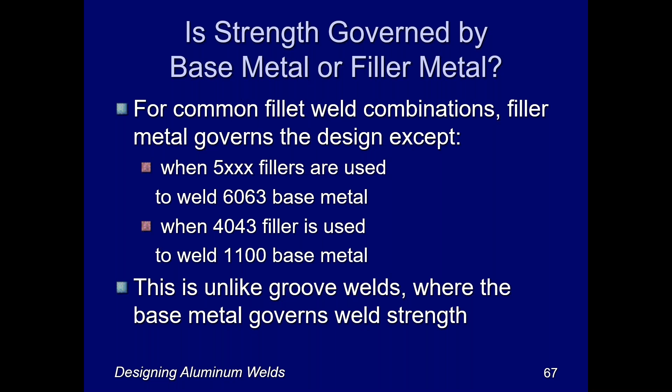Well, thank you very much for listening today. If you want more information about aluminum welding, you could go to the American Society of Civil Engineers. There's a seminar there on aluminum structural design, which covers the design of weldments as well as welded members. The American Welding Society offers a 6-hour course which incorporates what I've said here today and a lot more. I co-sponsor that with a real live in-person aluminum welder, and we have a lot of fun with that. The next one's coming up in July. If you're interested, check them out with AWS or ASCE. Thanks for your attention, and now I'll turn it back over to Nancy, and we'll talk about any questions that come up.